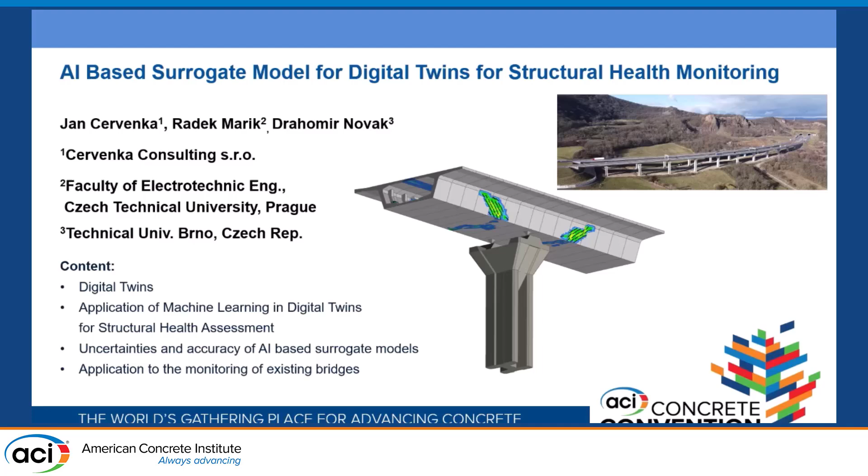So just very briefly what we are doing, I come from Czech Republic. Our company is producing technology, mainly software for advanced analysis and modeling, like you can see here, of the structural behavior, considering the cracking, reinforcement yielding, all the important nonlinear effects in reinforced concrete structures.

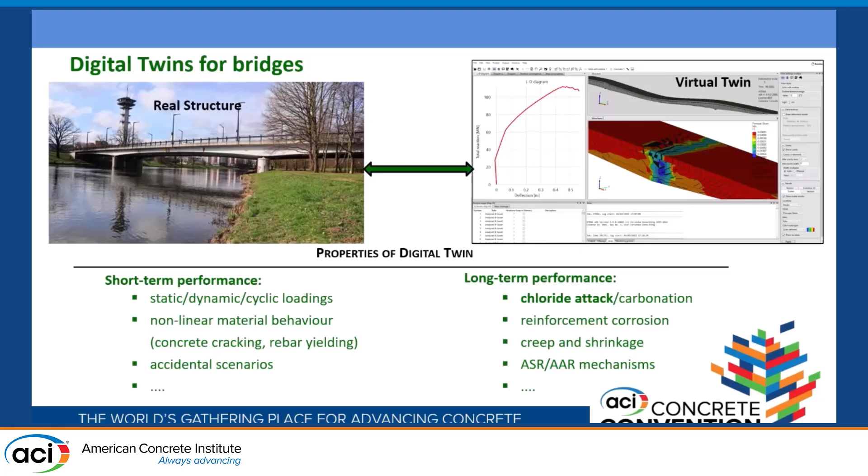So we use this in the context of digital twins, which is a very famous or modern term now. So what we want to do is we want to combine the results from the real structure and the monitoring of the structure and the virtual twin. When you put it together, then it is often called digital twin. But to tell the truth, to have a true digital twin, there should be a very runtime, extensive communication between these two. So this is still something we are a little bit developing and working on.

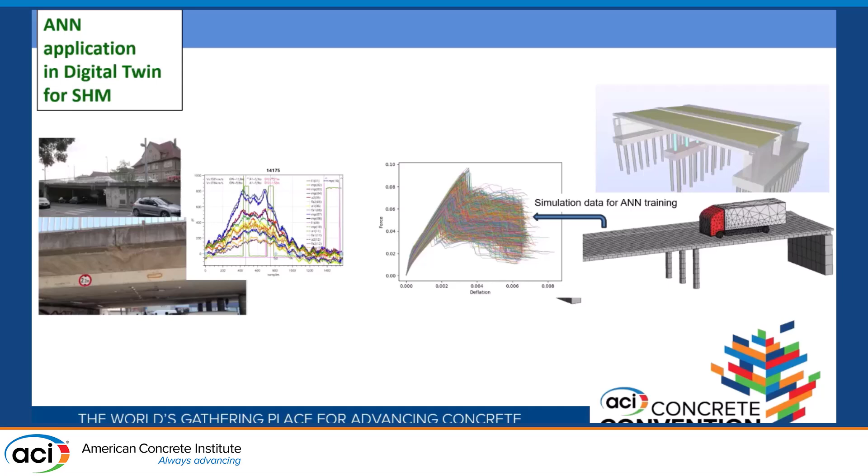So how do we use AI? So on one hand, we have our structure with the monitoring applied there, getting some monitoring data, typically in terms of some strain readings, and on the other hand we have our finite element model where we can model the real structural behavior. And as you know, every time we make nonlinear analysis, we actually end up with many analyses, sometimes just to tune up the model, but then we can also make some parametric sensitivity analysis, so we can produce a lot of results, and we can use these results to train our neural networks.

We are using the artificial neural networks, and we are using them for two tasks. First task is to help us with the parameter identification. That means when we have the data and our model, we need to make sure the model is reproducing the data. The material parameters that we are using in the model are representative and produce accurate results. So for that we can use the artificial neural network.

And the other task is then, once we have a model which is calibrated and we have the data from the bridge, we can train again the neural network to give us answers quickly, because of course, based on the monitoring data, we can run some analysis to reflect what's happening in the bridge, but that takes time. Nonlinear analysis takes time. So in order to be able to do this at runtime, we can efficiently use this neural network model, which gives the answer immediately.

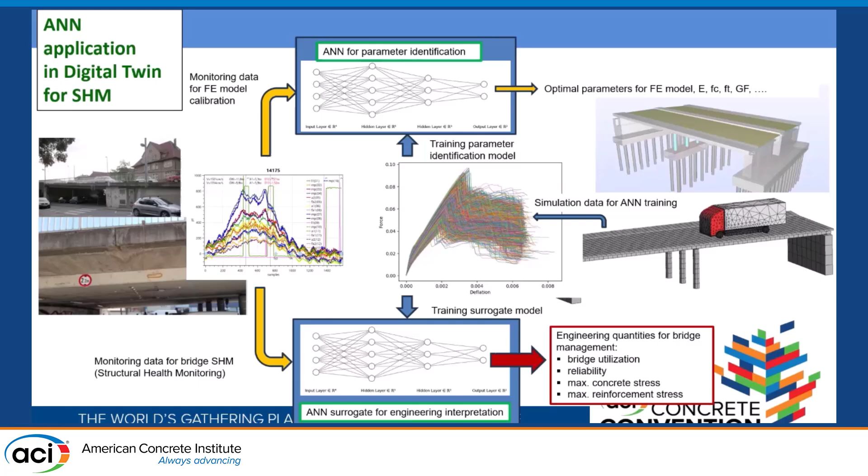And the typical quantities we are trying to extract are, for instance, the bridge utilization ratio, maybe the reliability index. Then we can even go deeper to get some information on what would be the stresses in the structure for the given monitoring reading. So this is the task.

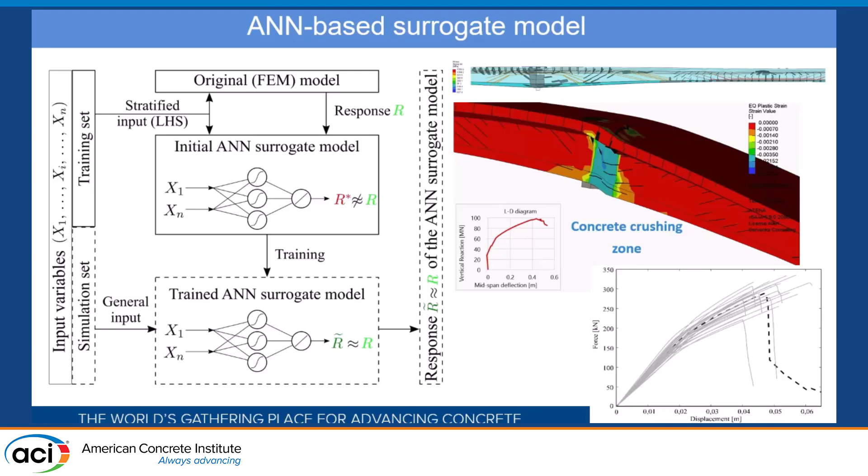Yes, so I told you we have this neural network model. So this is a typical way how it looks, and we always have to divide our sets into a training set and a simulation set, and we train it based on the results from a numerical simulation.

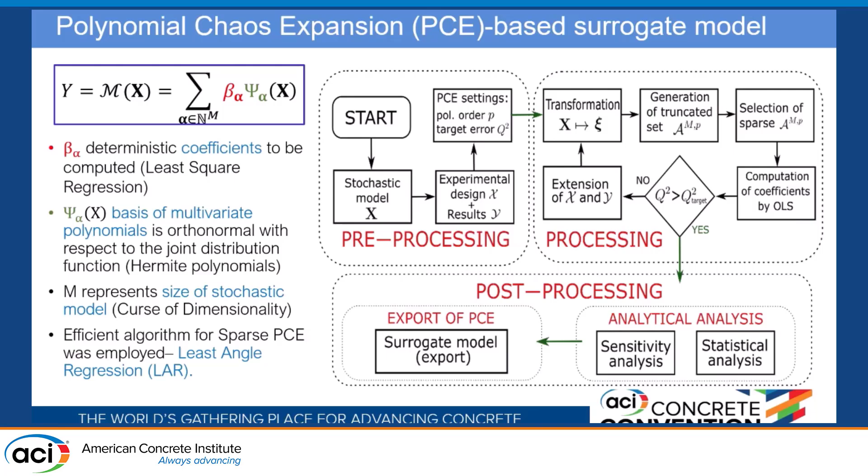What we can also use, and it is sometimes actually more advantageous than the neural network, is the polynomial chaos expansion. So basically there we can create a model where we need to calibrate these coefficients. These are these polynomials which are orthonormal with respect to the joint distribution, and we use some efficient algorithm based on the least angle regression method. So here is some diagram of how this works. Of course, it looks complex, but you can program it and then it works.

And now let me show some applications. So I will show two examples. One is a very simple one, actually a small bridge. But on the other hand, this is a nice bridge because you can nicely play with it. The nonlinear analysis doesn't take so much time. So it is a good example to evaluate it.

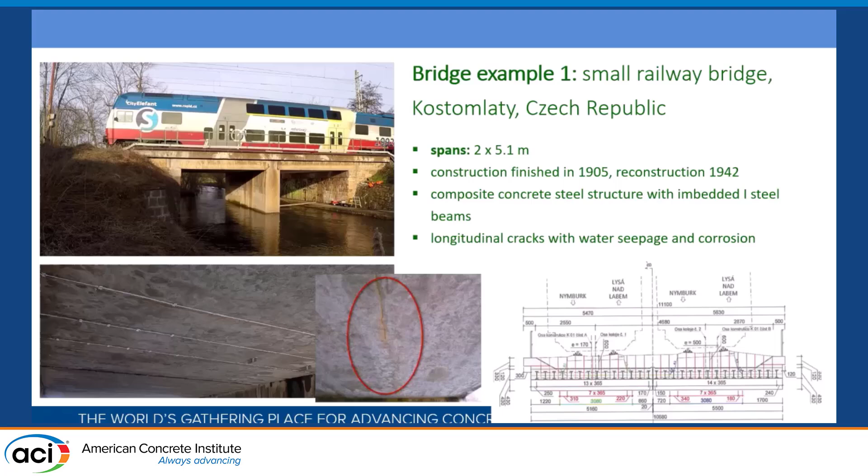And you can see there are some damages. Here you see some water leakage. There are some cracks in the longitudinal direction. From a structural point of view, it's a simple structure because it's a simply supported slab. And the slab is a concrete slab, and inside you have these steel I-beams.

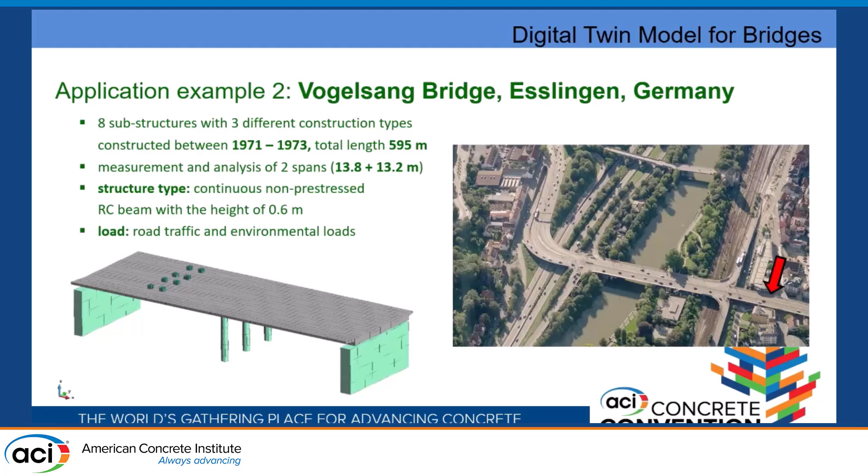Another structure I'll be showing is a little bit more complex. It is a bridge which is part of this whole bridge assembly. So it is somewhere here, this part that we modeled. It was constructed in the 1970s. It's a double span bridge, and it's reinforced concrete, so no pre-stressing. And in this case, a little bit more advanced monitoring was used.

This shows the strain gauges installed at the top and at the bottom. There is even a laser rangefinder, which is nice because it can determine the number of axles of the vehicles passing the bridge, even the speed of the vehicle. So you can get nice information about the weight distribution on the bridge. You can even see the speed of the traffic passing the bridge.

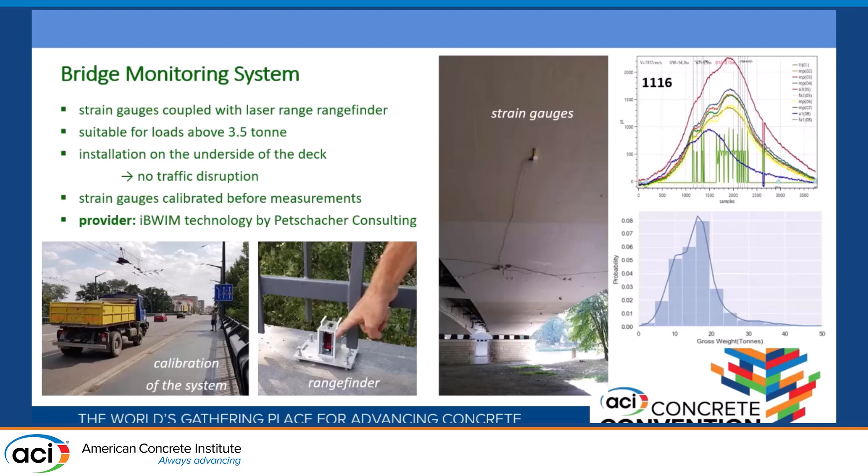Of course, it needs to be calibrated. To calibrate the system, first you need to have trucks with a predefined weight. And this shows what we can do with the finite element analysis that we want to somehow put together with the monitoring.

We also try long-term predictions of the structure in the future considering the corrosion model. Just to give you an understanding of what you see on the figures: this is the simulation of the bridge up to 150 years considering a chloride attack. This top figure shows you, during these 150 years, the chloride concentration at the depth of reinforcement. In the model, we apply surface conditions of the chloride concentration, and then we calculate how the chlorides propagate.

And actually we don't use a 3D model. It's very efficient because the chloride propagation, if you think about it, is just a local phenomenon. You don't need to make a whole 3D analysis. So we are using just a one-dimensional propagation model for the chloride or carbonation progress. When it hits the reinforcement, this is what you see. We have a discrete model of reinforcement. We know at each point the distance of reinforcement from the surface, the cover thickness.

When the critical chloride concentration reaches the reinforcement, corrosion is activated, and you can see here how the corrosion is increasing. Red is fully corroded, blue is intact, and you also see how this corrosion is affected by the presence of cracks. The model takes into account that if there is a mechanical crack, the chloride propagation will be faster. This shows the cracks in the interior, this shows the cracks on the surface.

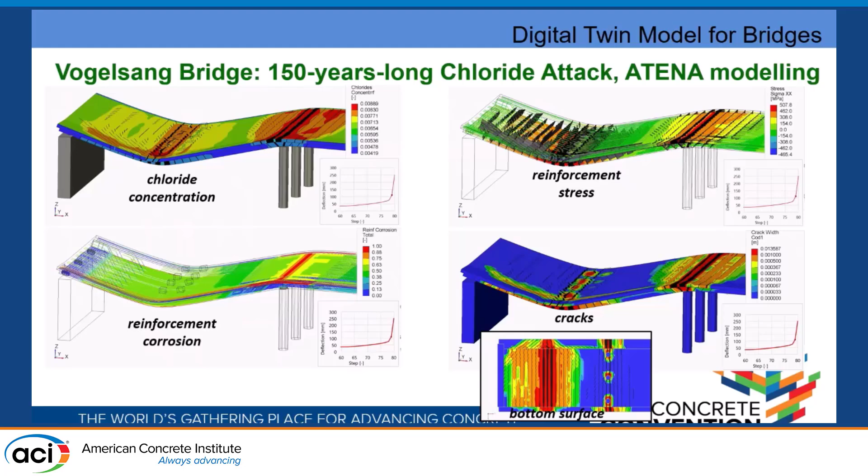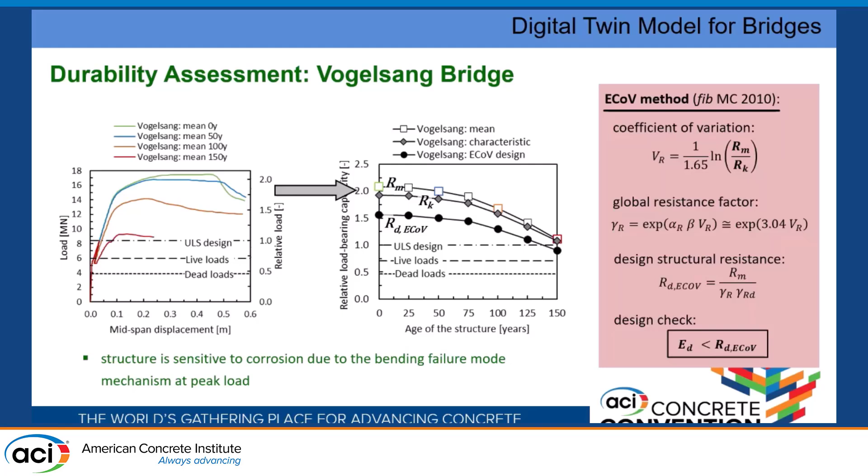And when we do that, we always load the structure to failure at certain times. So here you see the behavior of the structure intact, after 50 years, 100 years, 150. You see how the structural strength degrades due to the corrosion. We can plot it in time, and out of that we can get information on the expected life of the bridge.

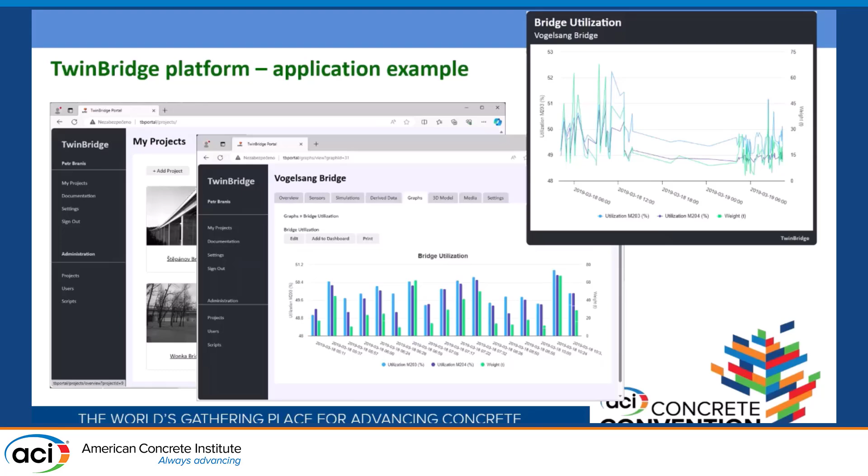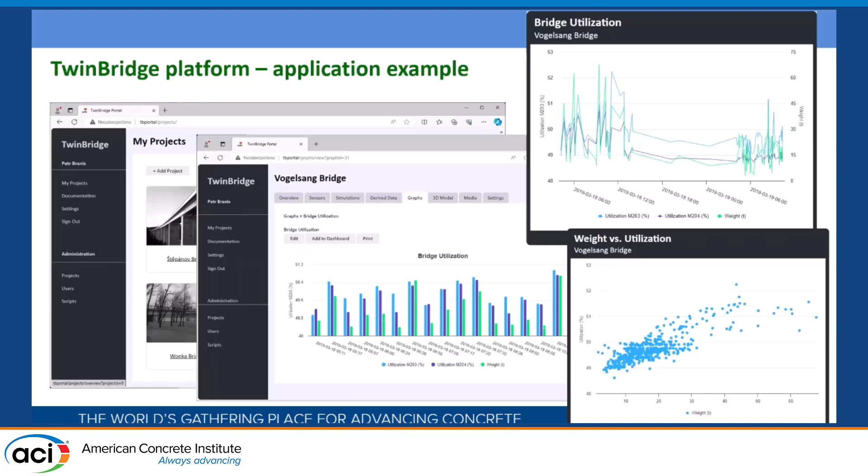All this is used in an online platform, where we have the projects, and we can output the utilization of the bridge when we have traffic events on the bridge. It can be in various types of plots, also in this scatter plot, which shows on the horizontal axis the weight, and this is the utilization for the various weights of the trucks or traffic crossing the bridge.

So to that we need to add other deformations, definitely from the self-weight of the bridge, and then maybe from temperature effects. And this, of course, we don't know. So we can use again the numerical model to calculate that. And when we have the total deformation, then maybe we can go to these load-displacement graphs and determine what is the utilization that we can then plot.

So of course we can make some estimates based on the numerical model, how to estimate these quantities. But here it is the situation where we can use the neural network as a kind of a surrogate model. I will come to that later. So we have these two ways how we use this neural network. One is to identify the parameters, and later on I will show you on that previous example how we use it to determine these deformations from the temperature.

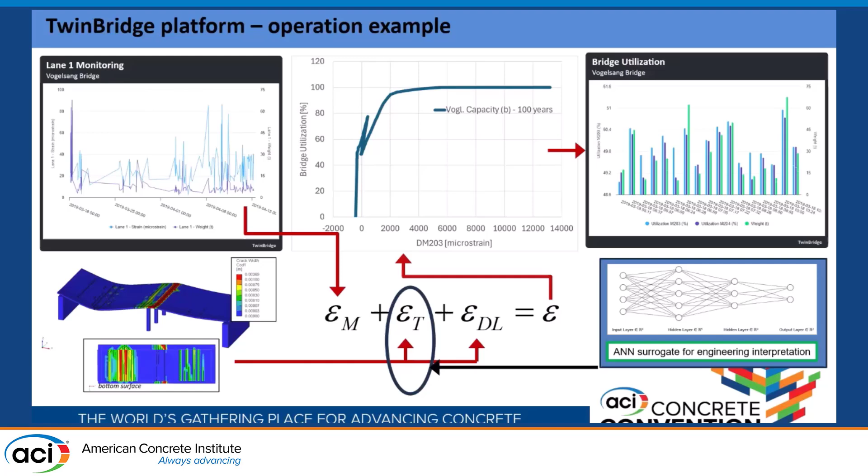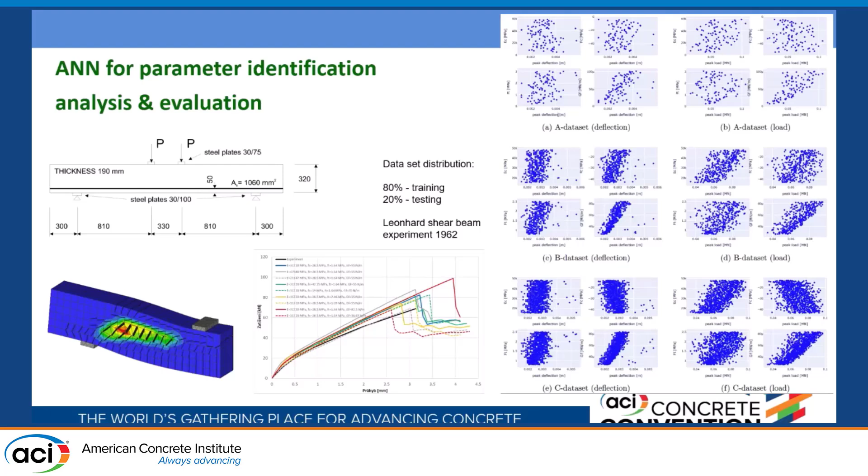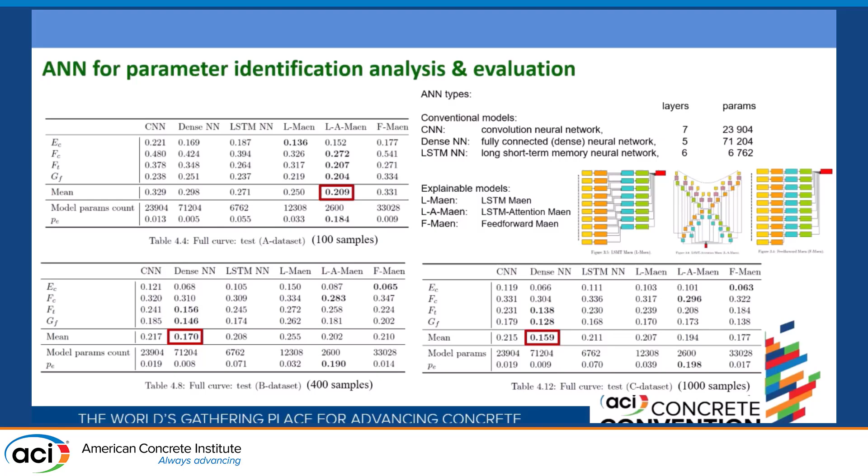And it is actually interesting to see the various accuracy. It was interesting to see that the best one was almost this dense neural network. Also a good one was this L-A-Maen. But it's better to see here. So it is also interesting how it is able to predict some quantities. Yes, it very much depends also on the structure.

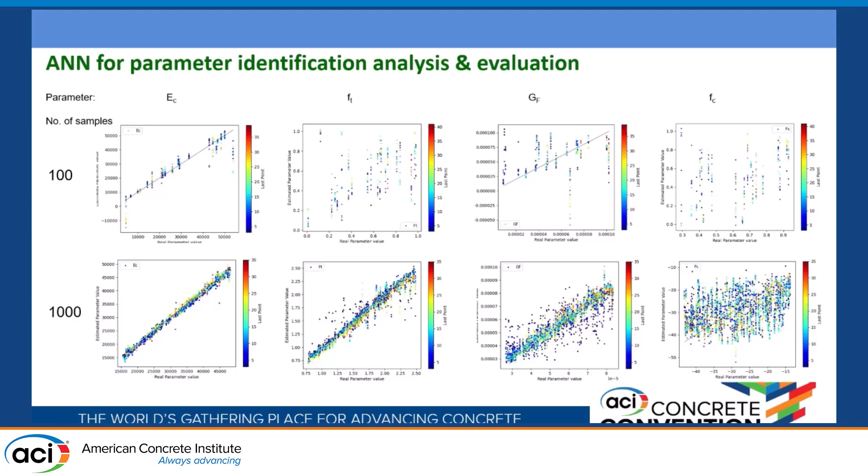So for instance, this structure we used, which was failing in shear, there was no dependence. You cannot use it to determine compressive strength. Compressive strength cannot be used even for the 1000 cases. But especially for Young's modulus, it is pretty good. For tensile strength, it is starting to be good, but you need a little bit more analysis.

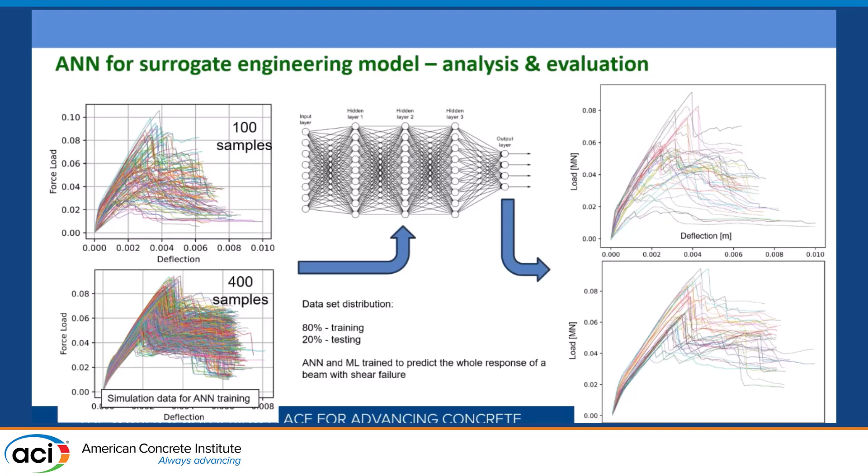Now I am coming back to this second example, and I told you that we want to use this numerical analysis to train the neural network as a surrogate model to determine what are the deformations from the temperature. Because this is what we know, yes? We are measuring maybe the passing of the train, but we don't know what are the deformations from the temperature that we should consider also in the total assessment.

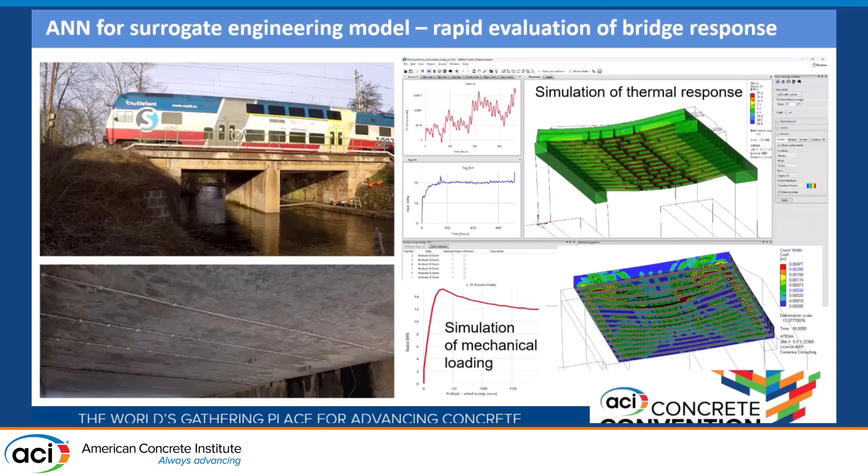So what we did is that we take the temperature readings, typical temperature profiles, so we can take concrete temperature profiles for the given location. Either we have a sensor, when you monitor you typically can also have a temperature sensor, or we can also go to the internet and download the typical meteorological data for that particular location. And what we did in this case, we always take the temperature at a certain point. We take the history there for the previous 24 hours, and then the average for the previous 2 days. And we use that to train the network and then to obtain the strain at the sensors.

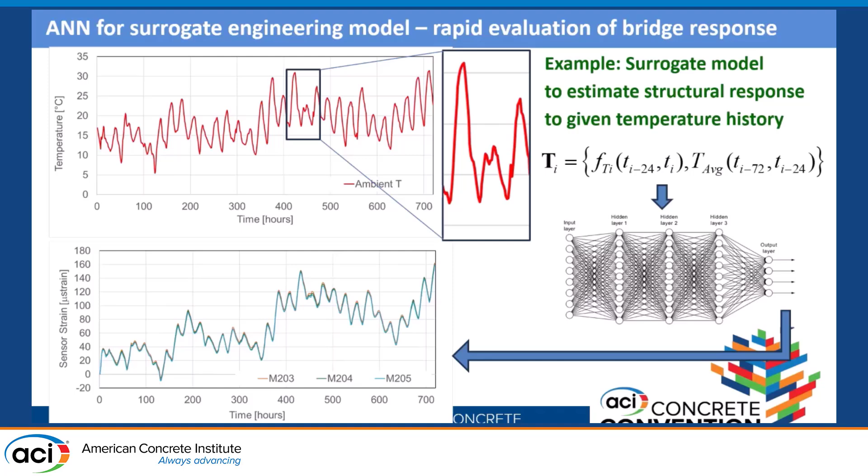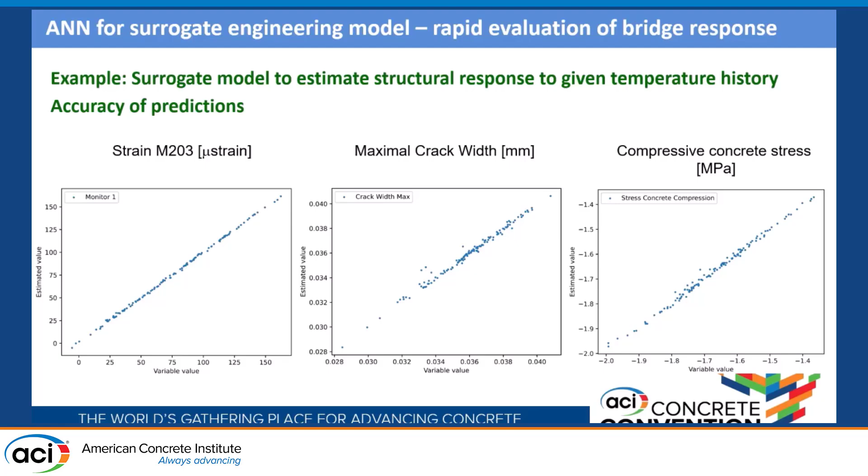And when you do that, you get quite nice results. So it shows the prediction of the strain. So this is, let's say, the variable value, this is the estimated value, and of course you should have this kind of linear relationship when it is perfect prediction. So we can train it to predict strain in the sensors, and then we can also train it to predict what would be the crack width, maximal stresses in concrete or in the steel.

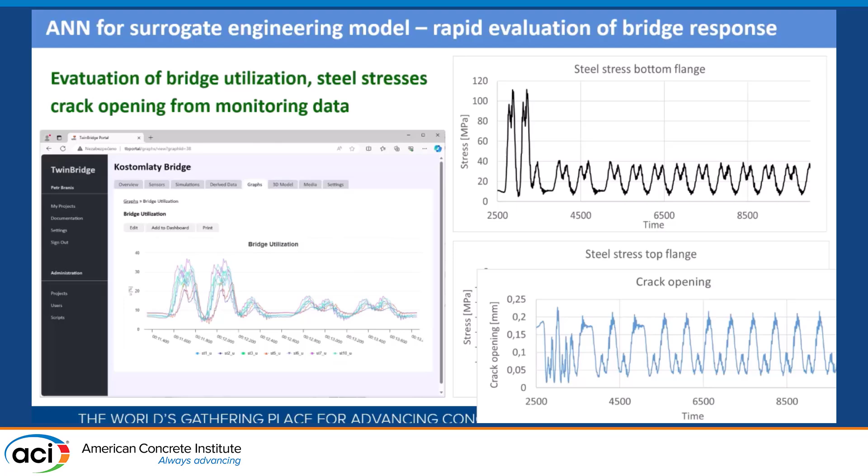So with this, I will summarize. So we are using this digital twin, combining monitoring with numerical analysis, using our software ATENA, and also we are using this durability model to be able to predict the life cycle, basically, of the structure. And machine learning we use in two ways. One is for the identification of the material parameters to help us calibrate our numerical model based on the monitoring data, and then for providing real-time, fast, rapid data during the monitoring.

And for that we use this surrogate model based either on neural networks that I was discussing mainly today, but we have this other possibility with the polynomial chaos, which actually sometimes brings even better results.